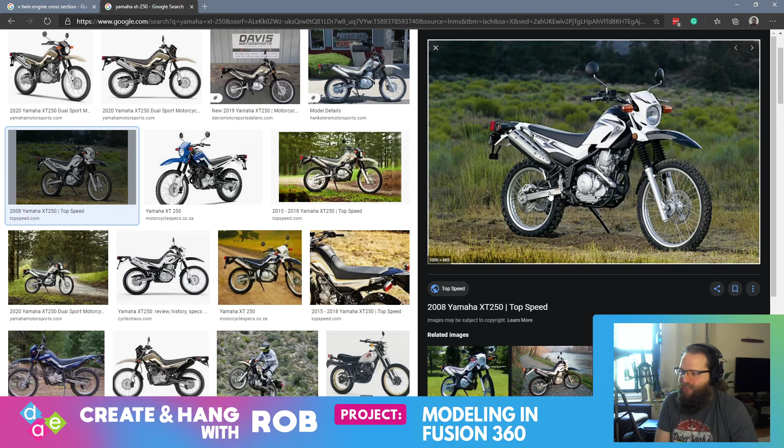It's an air-cooled, single-cylinder, carbureted thumper, 250 cc's, super light, super low seat height, super torquey engine. Awesome bike to learn on, an absolute blast. At that point, I didn't do any off-road riding - it was just the first bike I got because it was inexpensive, easy to learn on, and light. Plus, you have to love Japanese motors because they're absolutely bulletproof. You cannot kill the motor in an XT250, you'd really have to try. Never need valve adjustments or anything like that. They're amazing engines. Anyway, that was my first bike.

Throughout the last 12 years, I've owned a couple of different bikes. I had a Yamaha Cruiser, a Harley, a sport bike, and a couple of other dual sport bikes. Now currently I ride a KTM 1090 Adventure R and a KTM Duke 390. The Duke 390's got a little single cylinder 390cc thumper engine - probably the most fun bike I've ever ridden in my entire life. Absolutely awesome. And my KTM 1090 looks like this.

I had just gotten that bike not too long before then, and the bike's a lot bigger than an XT250 and any other bike I've ridden off-road, so it's a little intimidating, but since then I've gotten pretty good at riding a big bike off-road.

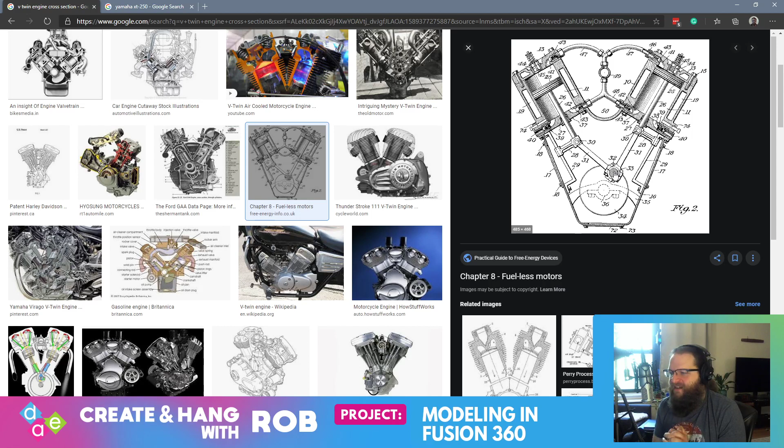And so what I've done thus far is not very much. I'll take you through. So I basically drew up a crank. Here's our crank. And of course, I've separated these out into all different components in case I want to try and simulate some motion later. But at any rate, I have a number of components here.

So first thing I have is I have piston 1 and piston 2 as two separate components. Let's shut everything else off except these. So in the piston, what I've done is I've made a little pocket joint there. Probably not the ideal setup for a real engine, but I don't care. I just want this to function.

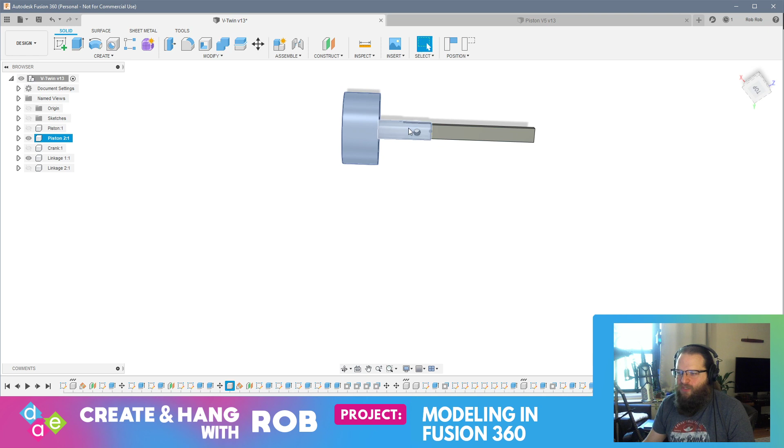And when we've got our linkage, the linkage slips into that little pocket, and basically we'll be able to put a pin in this to hold it in place. There's going to be a little head of the pin on both sides going through. The other thing that's going to be really interesting is the head of the pin is going to need to be curved. That's going to be interesting.

But because we've done this in separate components, I think it shouldn't be too hard. So I've done that - I've made the linkage arm slot into that. We can put our other piston and linkage on, and you can see I've done the same thing. These are 75 degrees apart.

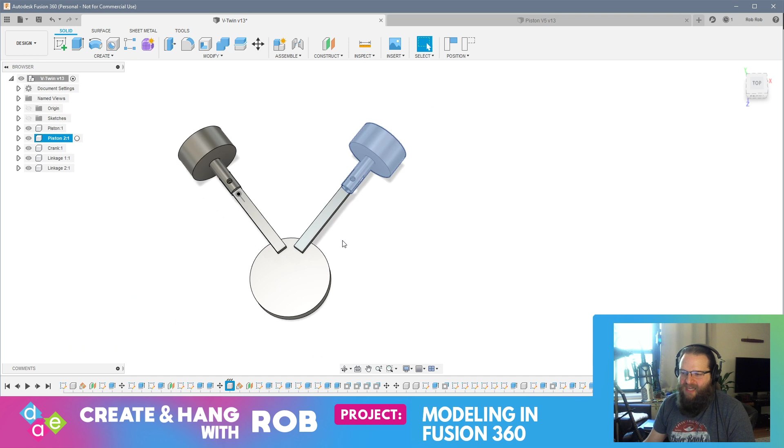And then I've got a crank down here, and basically I'm going to set up the linkage down on the bottom. And it looks like I may actually need to move the crank down a little bit so that those two linkage arms come together and meet at a nice central point.

There'll be a hinge here and a hinge here, and then we'll have a hinge on the bottom. And that way, when this turns, these two linkage arms can rotate around, and that will cause the pistons to move up and down. Eventually, what I'm planning on doing is designing some cylinder heads that have little cutouts so you can see the pistons moving up and down inside of them.

And then I'll probably have a base. So we'll have a base, we'll have the V-twin, and we'll have a hand crank that will power our V-twin motor. Now, normally, the V-twin motor runs, and that crank is then connected to a linkage to the transmission.

And then the transmission is connected to the final drive, which is either a chain or belt or shaft, and that's what turns the rear wheel. So the engine creates the power. The power is transferred through a series of different steps: transmission, the primary, the transmission, the final drive, so on and so forth.

We're going to run this in reverse. So we're going to be the power, and that's going to run power through the V-twin to get the pieces to move. So not that that makes any difference to this project. I just thought I'd share that.

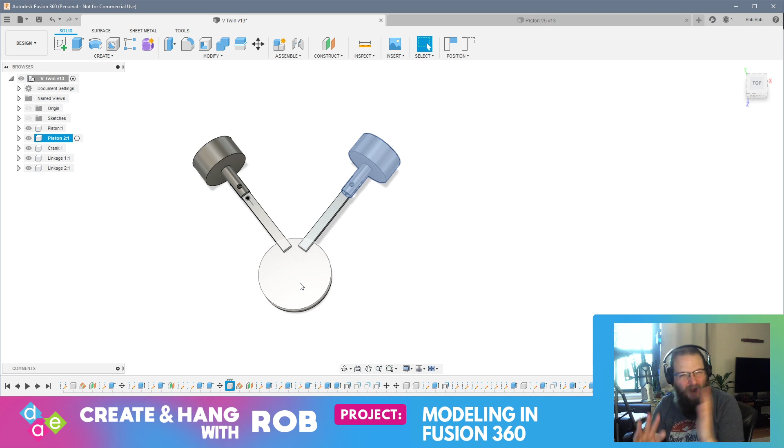So we'll basically have a hand crank connected directly to the crank to get this thing to move. Probably on the outside, there'll be a linkage of some kind. So at any rate, that's where we're at.

So I think the first step of what I'd like to do is move this crank down just a small amount and then pull these out. And then we'll design the hinge on this part. Then I think I might take a stab at the pins. And then I might take a stab at doing the cylinder heads.

But I have no idea - flying by the seat of my pants today. But I got all the preliminary stuff done, so I don't have to bumble around with measurements and angles and all that. Basically, what I had done originally is I had created some sketches.

Now, I moved things around, so these are going to look really weird. But I had created some sketches. Let's just turn them all on so you can see. I created some sketches to figure out where the crank was going, and I had pulled the 70-degree point down to the center of that.

That might have been wrong. I should have gotten the 70-degree point from the... Well, I'm going to move the whole crank down, so it doesn't make a difference. But at any rate, I used some guides - I drew some guides to help me figure out those angles. Probably would have been a better way to do that, but that's okay.

So, to start out with, I think let's take this crank and let's move it down slightly. That looks good. So, there's my crank.

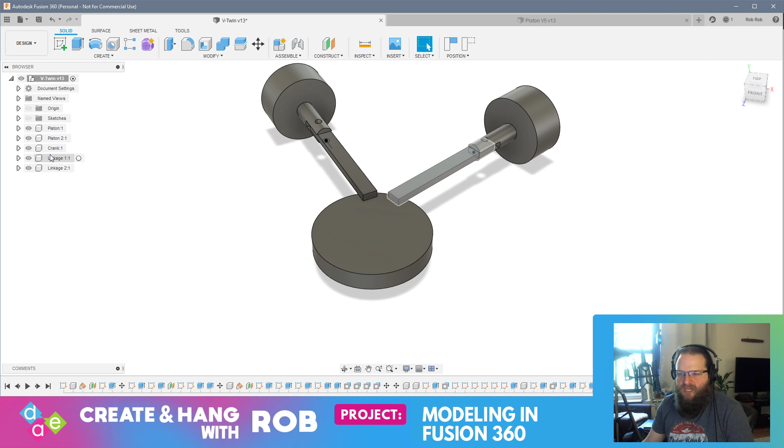Very good. Then what I'd like to do is let's get linkage 1, and we're going to basically... let's just activate that, and we'll push-pull this down 160. Actually, you know what? Whoa, that was 1,000. That's not going to work. Let's bring it down 155, and then we'll do the same here.

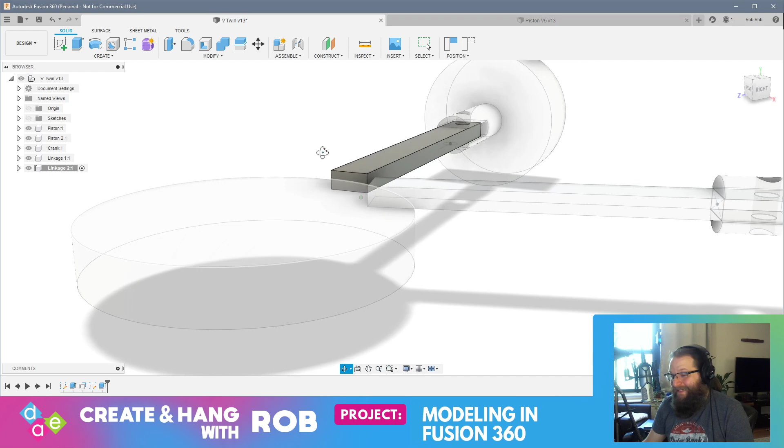All right, cool. So now I've got the linkages to a point where I now, on the crank, can draw a nice circle, and then I need to figure out how I'm going to connect these. How am I going to connect these? Well, at any rate, what I think we should do...

What I'm a little perplexed about is figuring out... Let's get this top view here. Something also looks off about this, but I'm not sure what's wrong with it. So be it—let's pull this down a little bit more. Let's make it 160, and we'll do the same with this. All right, beautiful, that's looking better.

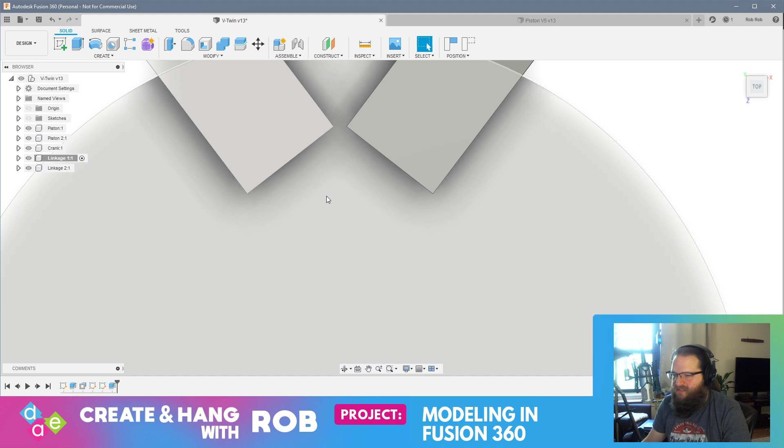Now what I think I'll do is draw a circle. I'm going to kind of eyeball it, which I probably shouldn't. I probably should pull these to where they intersect and find the center point, but forget it—let's just keep it simple so we can keep this project moving.

So we're going to sketch on this face. Capture position, that's fine, and I think we can probably eyeball this. If I go about here and draw—let's make it a 50. No, let's make it a 40. Let's make it a 30. I think we can work with this because now we can design some rings that fit around this.

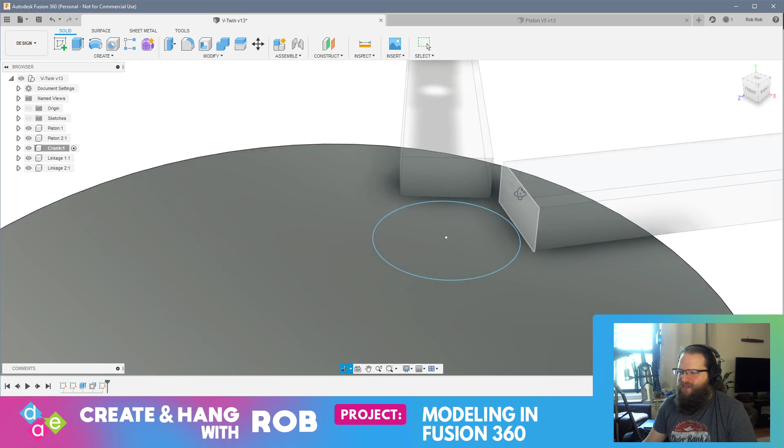Well, let's start with the sketch. I'm having some thoughts—these are separate components, so I don't know if I can join these two together. I probably should keep them separate because I have to think about how these are going to fit around this. Maybe I can make offset rings.

So the height of this is whatever the height is. Did I just draw that sketch on the wrong—no, I drew it on the crank. Okay, I just... back up. I think what I can do is draw some offset rings around these to get them to work properly.

So half the height of the bottom one will go on the bottom, and half the height of the top one will go on the top. They may be flimsy, but I don't know. At any rate, what I think I'm going to do is make a hole, because this needs to be assembled—this can't be all rigid.

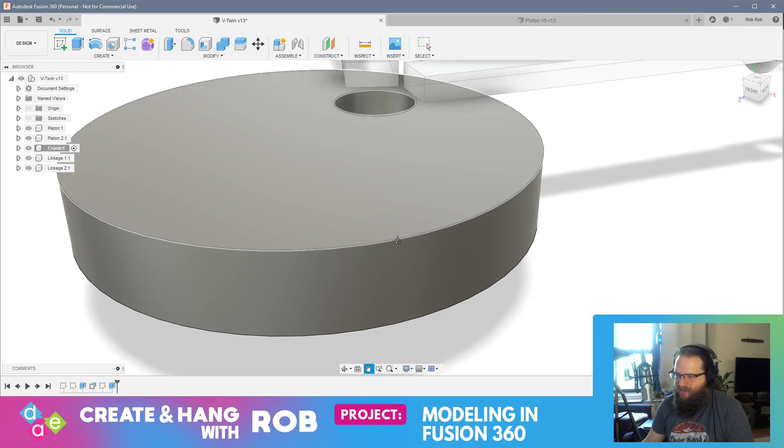So now I have this hole here, right? And I think maybe what we can do is design a pin as a separate component that pushes through. So basically there'll be a cap and a pin—a 30 millimeter pin, or it'll be 29.5 millimeters—that pushes through and comes up a little more than the height of these, and then we can put a cap on the other side. I think that's what we'll do.

So I should save this. Let's make a new component—new component. We're going to call this crank pin. The parent will be our assembly. Apparently you can nest components within components, so maybe there's a way to do this that way, but I don't really know how. I don't know the details. That might be a Lars Christensen question, but we're going to figure it out.

Okay, so I now have my crank pin, and I'm going to start a sketch on the face of this. Part of the beauty of working with components: first of all, components have their own timelines. You can see I have just one item in my crank pin timeline, which was me creating this sketch. They have their own sketches, bodies, and origins—all these little self-contained units with their own geometry.

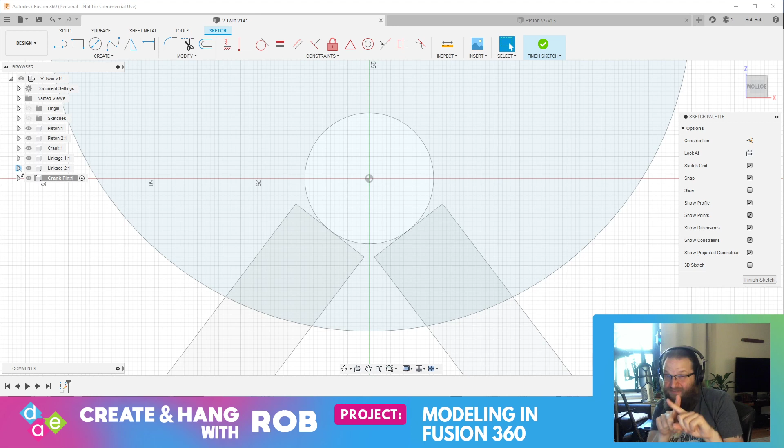The other thing I love about components is you can use other elements in your assembly as guides for sketches, but they don't join together. Whereas if I didn't use components, and the pieces were touching, they'd become new bodies and all get joined together—don't want that to happen. So I can use the geometry here.

So what we'll do is create a center point circle. We're going to make it 29.5 because I want to leave a little tolerance—I really should give a millimeter of tolerance, but whatever. So I've got this now, and let's grab our new sketch.

And we're going to press pull it and bring it up—whatever the height of this is, which I actually don't recall. I think I made it negative, should be negative 25. Is that right? No, see that's sticking through at negative 24. Oddly I made it 24. I'm going to bring it to 24 and a half, so I have just a little...

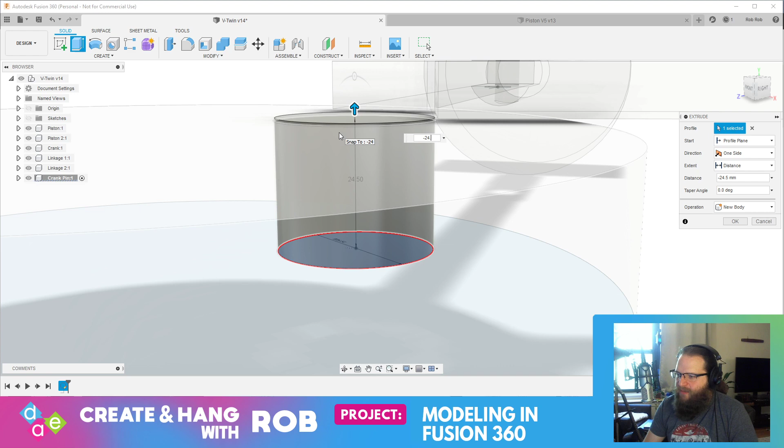Well, actually, that's not true—I need this to come out quite a bit more. Let's make it negative 30. Nope, negative 40. Negative 35—see, I didn't write down those dimensions. There we go, that should be...

That looks fine, negative 30. Okay, so I've got that, which is good. Now I think what I'd like to do is press pull this face down 0.5, just to give a little teeny bit of tolerance.

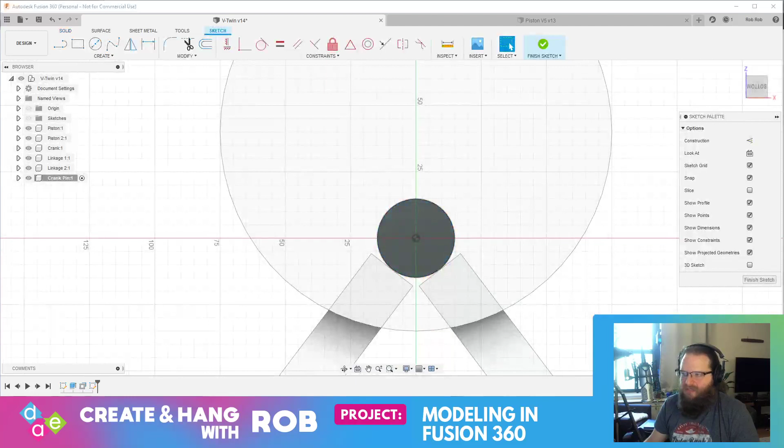And then I'll draw a pin end on that so it holds it in place. So we're going to sketch on this face and make a circle. I think I'd made that 30-something in diameter, so let's just make it 40. That should work. All right, then we will basically press pull these faces.

We'll bring that up 5. Way too much, let's bring it up 3. Very good. And of course I have to fillet this edge because, you know, why not? Because it looks nice. Totally unnecessary.

Okay, so now that I've got that done, what I need to do is make a cap on this to hold everything in place. So I think that I need these to be... yeah, let's make a sketch here, and we'll make a center point circle.

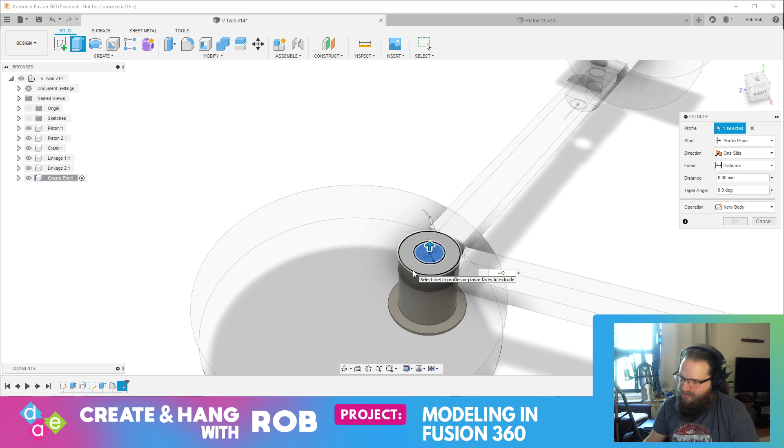And I'm going to make the hole in this. Let's just make it half the diameter. That's fine. And I think we can press this down about -10. Right? Now we have like a 10 millimeter hole going through this. I think that should be fine, because worst comes to worst, I'll just glue the cap in place.

And we can sketch on this face now, and I'll make a center point circle. Now I made that 15 in diameter, so let's make this 14.5. You know what, let's make it 14. Not 114. So that's great.

So now I can take this and pull it downward. If I bring it down -10, let's bring it to -9.5. Right, now it's a separate body. And actually, let's pull this up 0.5 so there's a little separation. Then I'll sketch on this.

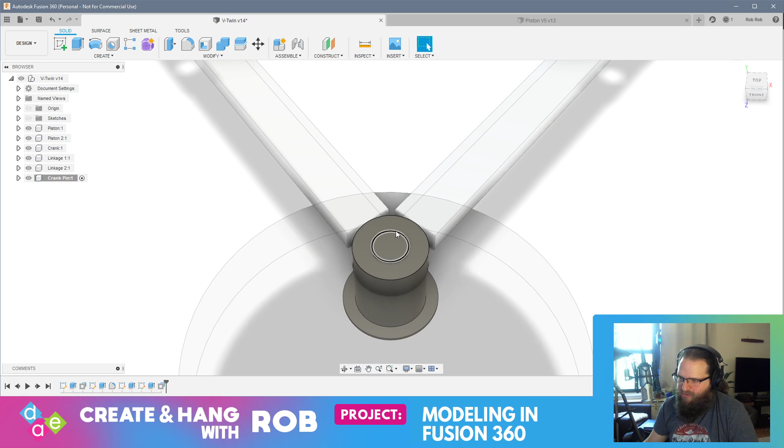I ran into an issue last time with my single cylinder mechanism, which basically, let's see, I made this, I think, 30... 35? No, I made it 40.

I ran into a situation last time where when I was drawing the pins to hold all the linkages and things in place, I have the outer part of the pin, then there's a hole, then there's the inner part of the pin, and I drew that and pushed it into that negative area. I pulled it too far down, and it connected it all as one body, and I wasn't able to 3D print it. Or at least when I went to export the STLs, they were all connected, so I would have to go back and fix that, but I'm not going to do that right now.

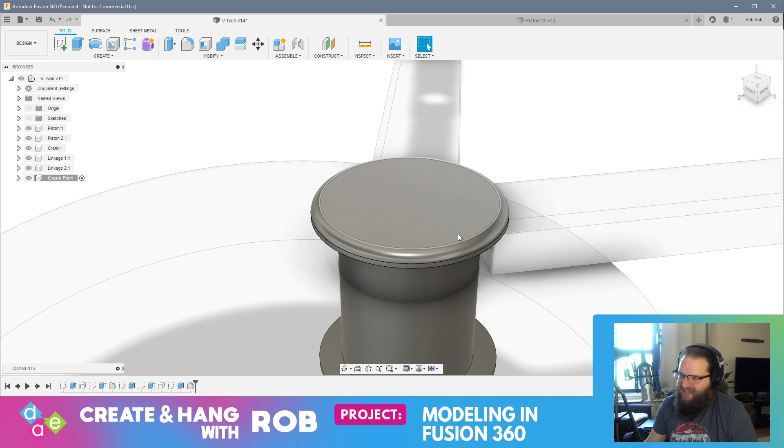Okay, there's my pin to hold the cranks in place. So let's save this, and let's view our entire assembly here. All right, great. So there's that part of this. Okay, great.

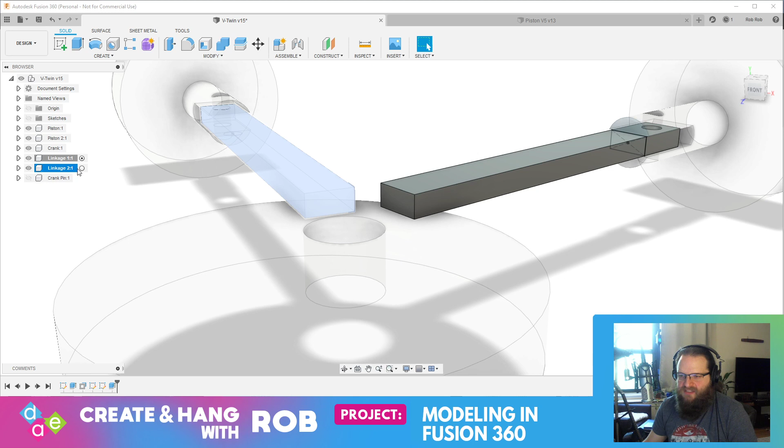Next challenge, let's get rid of the crank pin. And I need to back these linkages off a little bit. Let's back this linkage off. We'll do 155. No, let's make it 150. I'll do the same on this linkage. Select that component, we'll make it 150.

Great, okay, so now what I'm going to do, I'm going to start with linkage number 1. This is going to be tough, but we're going to make it work. We're drawing in that component, and I'm going to draw a sketch on this face. And I'm going to make a circle of a diameter of, let's make it 32, right?

We can make it 31. Okay, and then I'll make another circle, and we'll make that, what did I say, 32? Okay, let's do that. So I've got this now.

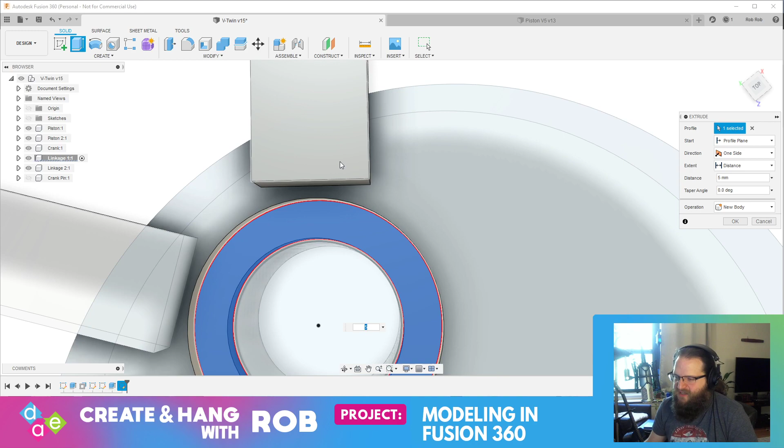And what I'm going to do is pull this up 5. Okay, cool. And now I need to make this connect to this. So I think what I'll do is I'll draw another sketch.

All right, I have an idea. So let's sketch on this face. And I'm going to basically... let's get the top here. And I think what I'll do... all right, let's try this.

I'm going to do a 3-point arc. I'm going to start at this corner, right there, and then I'm going to bring this down to, let's say, here. And okay, let's do the same thing on the other side.

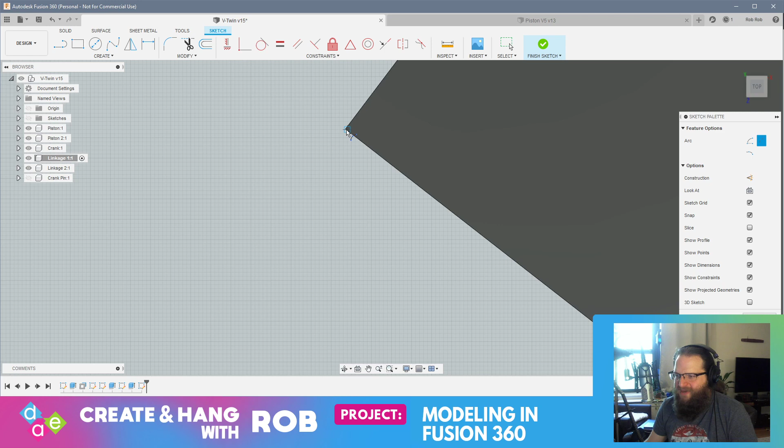You have to forgive me, I am extremely allergied out, because allergy season is coming around, so I can't breathe super well through my nose. So you may see me hanging out with my mouth open catching flies. That's solely because... oh, see, this is my perspective is weird on this. You know what, I'm going to undo this. I can't really breathe through my nose very well. That was the point of me telling that story. Odd story.

All right, you know what? I have another idea, let's sketch on this face. Once again, my angle is weird.

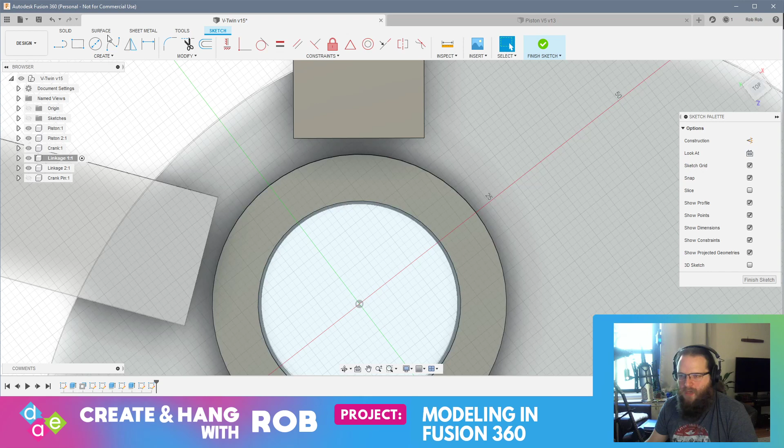All right, we'll do our best. All right, got our Wolf and Raven on today. Always, always Wolf and Raven. Always.

Just gonna... there we go, good. What we'll do is we'll come to here.

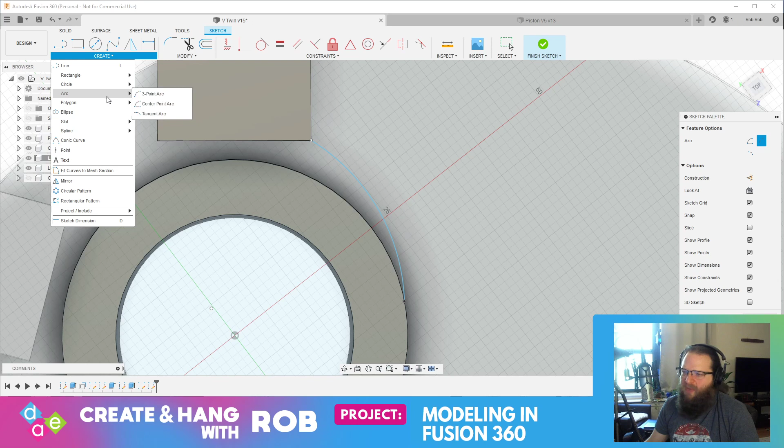I should have taken note of that. All right, I'm just going to do my best with this. I don't want to go crazy. It might not be totally exact, but it's gonna be good enough.

That looks pretty good. All right, and I need to connect these lines now. Hold on a second, let's edit this sketch.

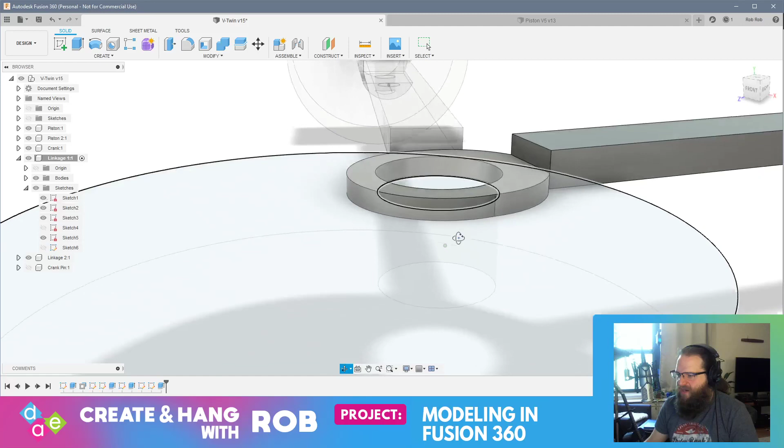So now I've got this little ring, right? Perfecto. Okay, so now what I'm going to do - I could probably connect this or fill it back, but I'll leave it the way it is. Maybe what I'll end up doing is drawing an arc or something to fill that down.

I think I have a problem here. Well, that's all right, no problem. Let's get rid of the crank for a sec.

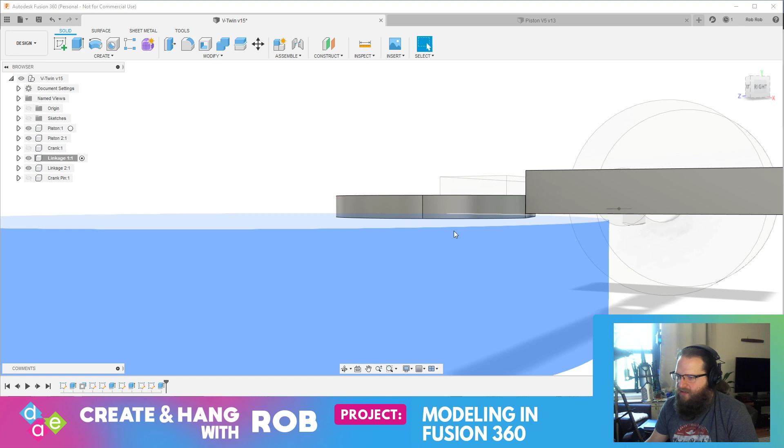Let's press pull this up, 0.5. There we are. And let's press pull this - so we brought that up. So that's 4.

So this is -4, and that goes to 5.5. Let's bring it up 0.5, that should be about halfway. Okay, fine, all right, cool.

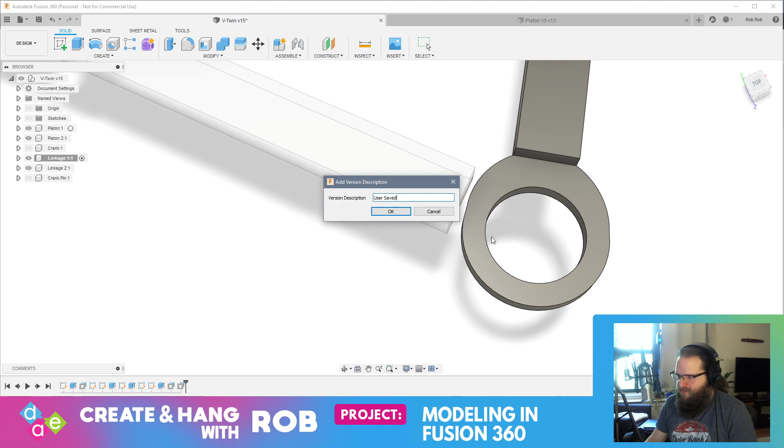Now what we'll do now - let me just save this really quick. You can see it's a little lopsided, but I really don't care. It's good enough, honestly fine. I probably could have done that another way, but whatever.

Okay, so now we're going to switch to this linkage, and I'm basically going to trace this but on this side. So I'm going to make a sketch here. I'll start with this and make my 31 millimeter circle, and then I'm going to make another 30, whatever it was, 30, 40, 45. Okay, there we go, and we'll finish that sketch.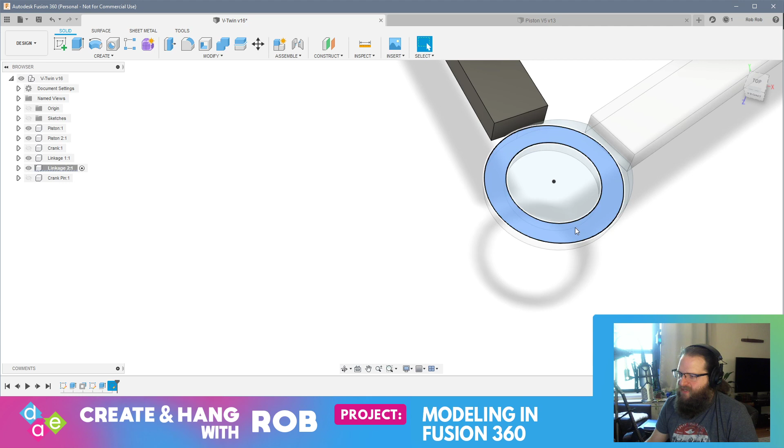And now I'll basically press pull this up - I'm just going to bring it up 4.5 for now. And then I actually need to press the bottom up a little bit. I'll bring that up negative 0.5. I think I can bring this up a bit more. There we go, that's it.

Okay great, all right so now I've got the ring. And so now, once again, I'll sketch on top of this, and we will make our little, I don't know, we'll make that 3-point arc thing again and push it down the 5, and then we should be good to go. All right, very good, sorry, I got lost in my thoughts there for a minute.

Let's do this. Let's get on the corner here, and I think we'll bring it to about here. Good, and then we'll do the same thing here.

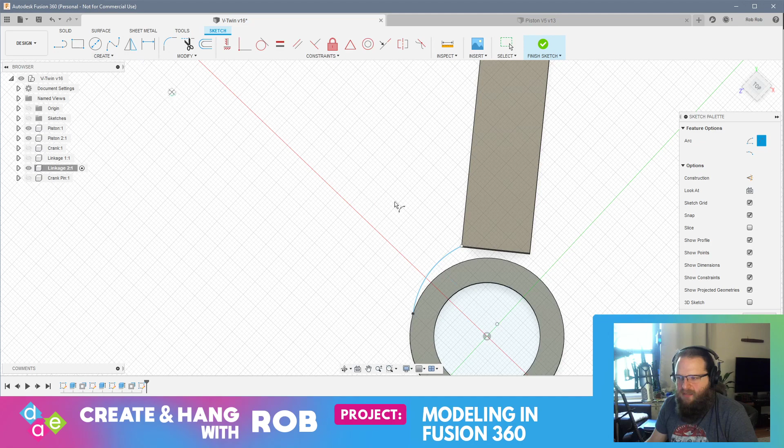And again, I don't care how perfect this is, I'm just trying to... so somewhere around here. That's pretty off, I don't care, I'm going to go with it.

Great, finish sketch. And now basically - yeah, it's not perfect, but I really don't care. Yeah, right? You can see that's pretty janky.

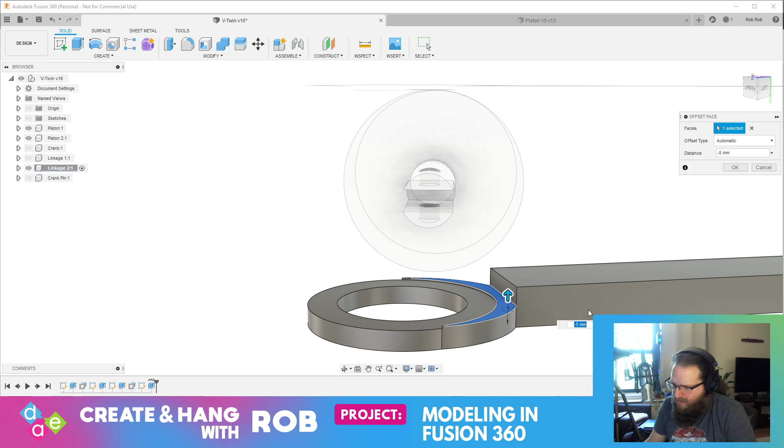Beautiful, okay, so now, there we go. Look at that, see how they sit together on that? Oh man, that's beautiful. And then, of course, I'll probably clean those edges up.

In fact, we might as well just do that now. Let me save - how are we doing on time? Halfway through, all right, very good.

Oh boy. Let's, what am I on? I'm editing this one, so let's put a sketch on this face. And I think what we should do is I'll just make an arc. That's fine, I'll make a 3-point arc.

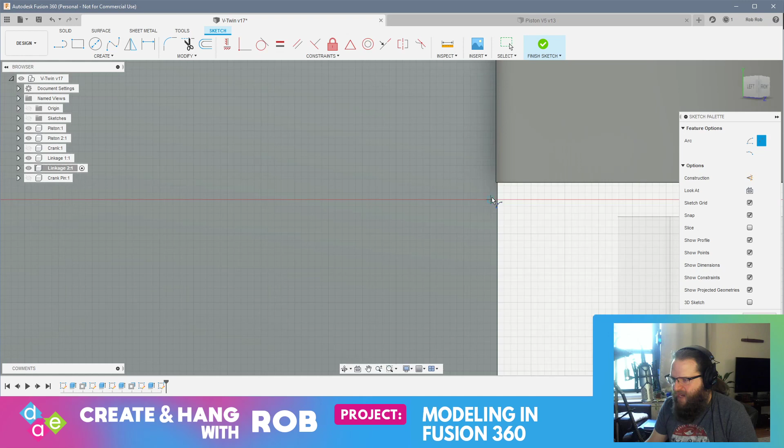And we'll basically grab from here to, so that would be, let's come out 15. Right, and then come to the joint, and we'll basically do that.

And now this, I can press pull and get rid of, and I got a little arc there. That's fine, right, cool, I got a little arc there. That looks nice. So we'll do the same thing here.

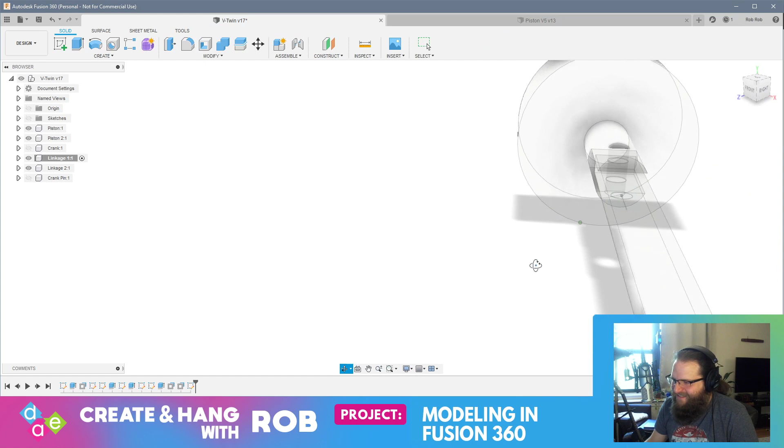So let's switch over to linkage number 1, make a sketch on this face, and I'll do the same thing again. I'll come in - oh my God, that's not connected. Oh no, oh that's awful. All right, hold on a second. I hope this one's connected. It looked like it was.

All right, what I'll do is I'll press pull this. That's fine, all right, these got connected. I sketched this one incorrectly. Whatever, it's fine, because I'm going to make the little arc thing anyway.

Wow, that was dopey, okay no worries. So, 3-point arc, here, and we will come in.

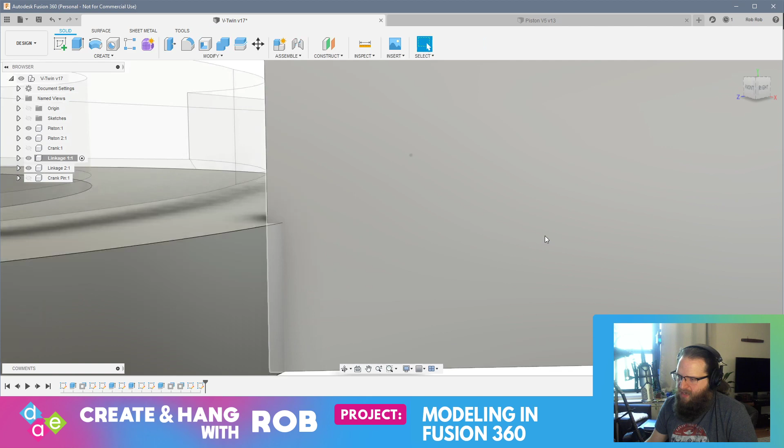What did I do here? See that? That's the one. Let's just go with that. That works for me. Oh, wait a minute. Oh, stupid. All right. Stupid, stupid, stupid. All right. Okay.

I'll tell you what, that KTM is really an incredible machine. I really love it. Like I said, I've owned a lot of bikes, and I really find that bike to be such an enjoyable experience to ride. You know, every bike has a positive and a negative, things that work well and things that don't work well.

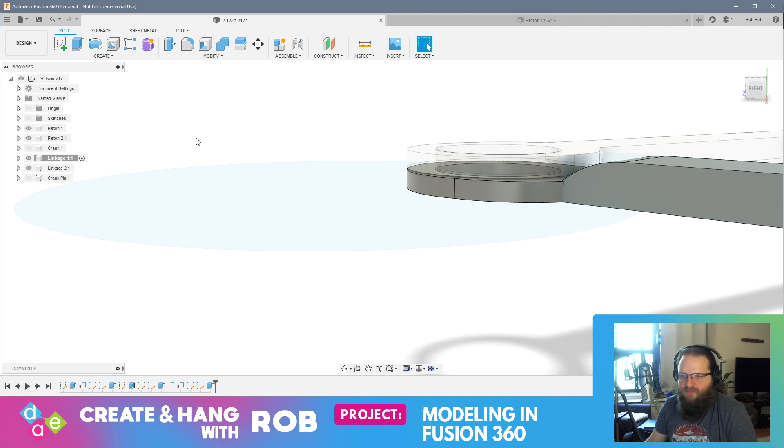All right, good. Perfect. Okay. And, you know, at first you buy a bike because you like its style, right? Oh, is that beautiful? Is that beautiful or what? Oh, wait, hold on. Let's put the... Oh, my goodness. Oh, my goodness. We'll see if any of these constrict with each other. They shouldn't. It should say separate.

Anyway, you buy a bike at first because you like its style. You like the way it looks, those kinds of things. You like its color, you like its design, you like the engine. But when you don't have a lot of riding experience, you don't know what fits you and what doesn't. So you buy it based on looks, and it might be a bike that doesn't fit you.

Unfortunately, sitting on it doesn't really give you a good indication. You could sit on a bike and it feels good, and then after 20 minutes of riding you start feeling pressure points and things like that. I've had a couple bikes that were perfectly fine, they just didn't fit me very well. And it took a little bit of riding experience.

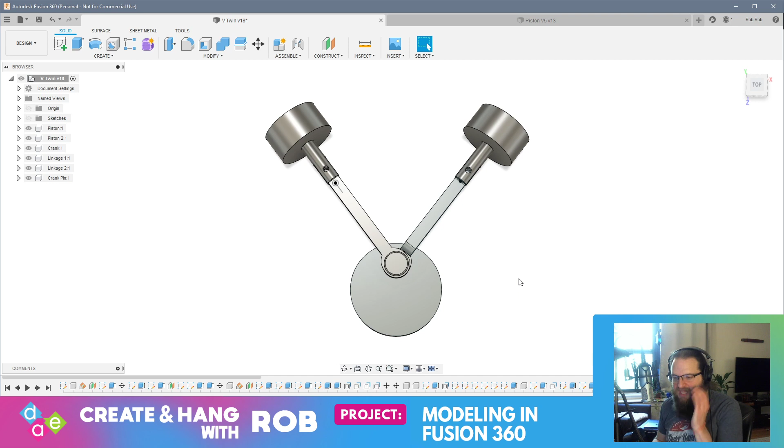I've ridden well over 100,000 miles in total over the last 12 years, and I know what works for me and what doesn't. I have some issues with my shoulders and neck, so bikes that are really leaned over... Like I had a super sport bike, a Yamaha R1. What an incredible machine.

But you're riding like in the fetal position, practically laying on your belly, craning your neck while you're riding. It was such a great bike, but it was not enjoyable to ride for a long time. You ride for an hour and then you need to get off and stretch. I've ridden for like 14 hours on my KTM 1090 with minimal discomfort.

That bike fits me well. It caters to all of my needs. The wind protection isn't the best in the world, but it's super smooth on the highway—I could sit on the highway all day. Super fun on twisty roads. If I see a cool dirt road, I can just ride on it. It just checks all the boxes for me. I absolutely love that bike. Riding with a passenger is great too.

Anyway, I absolutely love motorcycles. I like things with two wheels. I've been getting into mountain biking a lot lately. Maybe we'll design some mountain bike components—that would be cool. Anywho, I think what I'd like to do next—I'm really pleased with that.

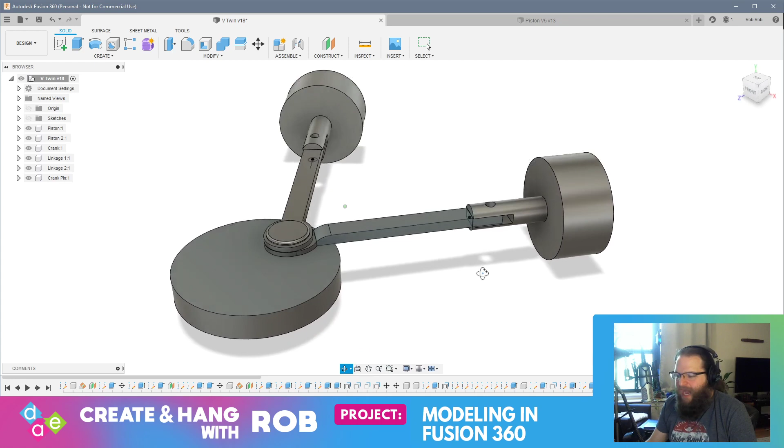See those offsets where it all links together? I am really pleased with that. I bet there's going to be some issues where I may need to cut a little bit more out when I actually print this. But, I mean, we got ourselves the beginning of a V-twin here. I am pretty psyched.

So what I think we'll do now is design the pins to hold this little joint in place, which is going to be interesting. I know what to do though, it's not going to be hard at all. I know what to do.

Okay, so let's start with linkage 1, this one. So let's create a new component, and we'll call it piston pin 1, and then we'll make piston pin 2. I could copy and paste it, but if you copy and paste a component, changes to one component apply to the second one—if I move one, the other moves. So I think I'm better off just doing them separately. I don't think it will be challenging.

So we'll make a new component. This will be called Piston Pin 1. Okay? We're on Piston Pin 1. We're all set up there.

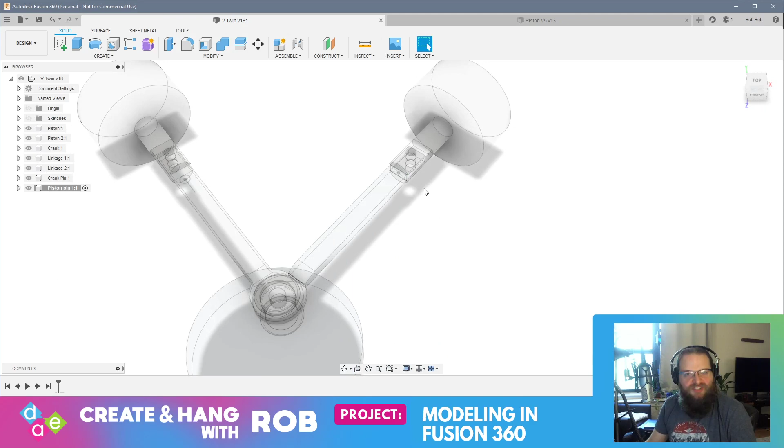Essentially what we'll do is make our simple, normal pin mechanism. Piece of cake, no challenge. The only difference is it needs to be curved. I mean, I could make it flat and just sitting on top, but where's the fun in that? Let's make it curved, it'll be awesome. And I know how to do it, I think.

Great, so let's start with the inner parts, and then we'll do the outer parts. What's going to be interesting? Why don't we just sketch on this face? That's what we'll do, we'll sketch on this face. Very good, here's a circle. We can make a circle. The question is, can we get the center point of it? I could do a 2-point circle.

Oh, that's annoying. No, see, that's off-centered. All right, let's try a... all right, let's do a 2-point circle.

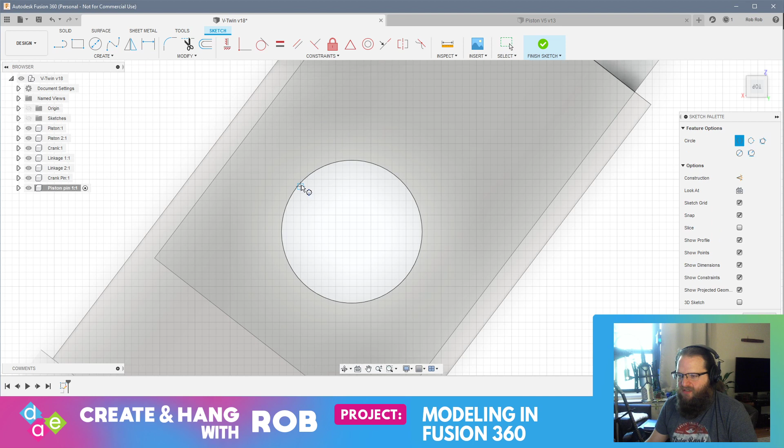Oh, you know what I'm going to do? Here, hold on, I'm having an issue lining the circle up, so I have a better idea. Ready for this? Let's get rid of linkage 1, and I can sketch on this face, and then I can just push-pull either direction. That's the way. See, now I can get the center point of the circle. Lovely, lovely. I think it's 10, so why don't we make it 9.5, because we need to put some tolerances on. Finish sketch. Lovely, lovely, lovely.

So now we're going to take this. Hold on, let's get this selected properly. It's going to come up, and I'm just going to push it up to here.

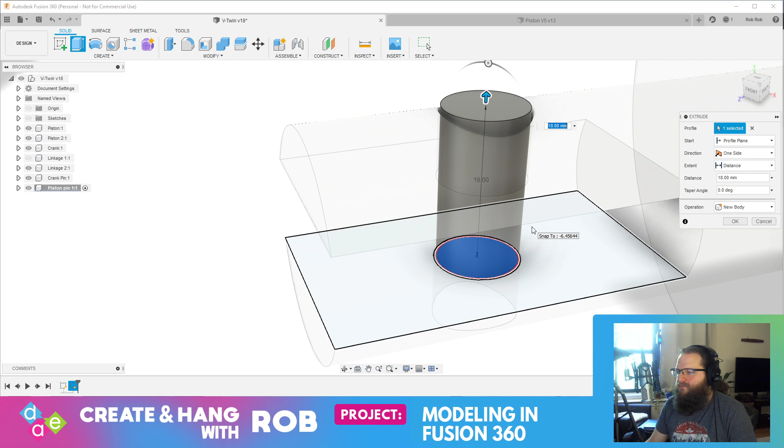I'm just having a thought. Don't worry about me. All right.

Let's just get the bottom part now, and let's bring this down.

So yeah, I recently discovered that I have, I knew about these, but I never actually did anything with it. There's an unbelievably nice mountain bike park right near my apartment, it's like 10 minutes away. And there's maybe like 8 miles of trails. I mean, it's nothing insane, but the trails are great. And what's awesome is they're really technical. And...

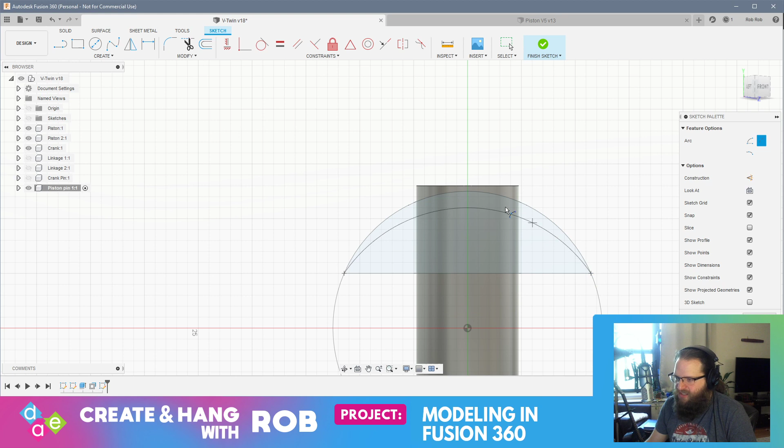Bear with me here, I have an idea. Ready for this? They're very, very technical and have a good mix of...

Hey! That looks like a curved top to me. So sweet, okay.

They have a very good mix of, like, downhill, uphill, technical rocks, drops, great trails. So, 10 minutes away, throw my bike on the bike rack and go there. Awesome. The closest place to ride my motorcycle off-road is not that close. So, it's... sorry...

I'm having a thought. All right, we'll do the other side first.

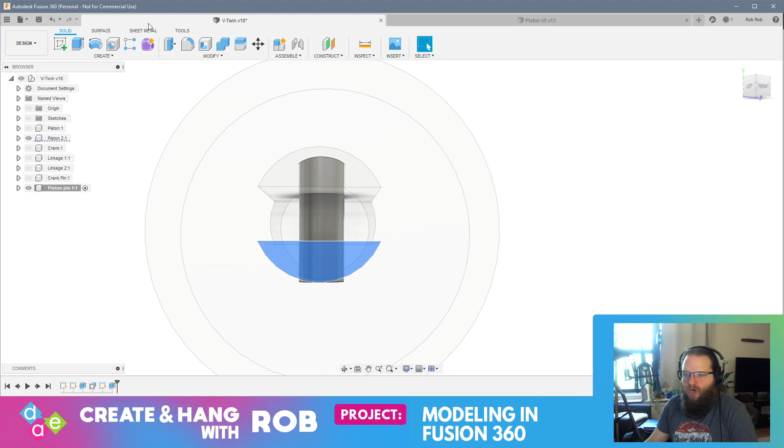Okay, so it's nice to be able to practice my off-roading skills so close to home. And quite honestly, the skills are very much the same. I mean, the body position is the same. Obviously, I'm not using a motor, I'm using my legs, but the body position is all the same. And it's all similar in terms of skills. So, it's quite fun.

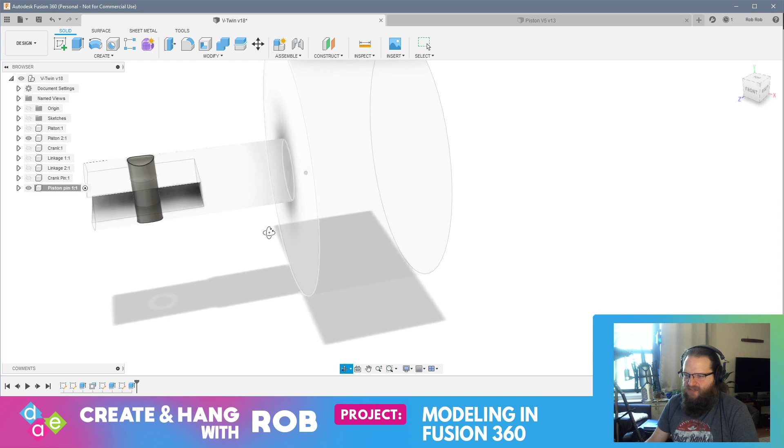All right, there's our curved pin. Lovely, lovely, it worked out great. Piston 1, all right, great. So there's the center part. Okay, just put the crank on for a sec. Cool, all right. No, I need the piston pin.

Okay, let's get rid of everything. Oh, I started on piston 2.

Oh, well. Yeah, it's really, really fun. A lot of uphill sections, a lot of downhill sections. Really good for working on fitness. It's great, it's just such an enjoyable experience.

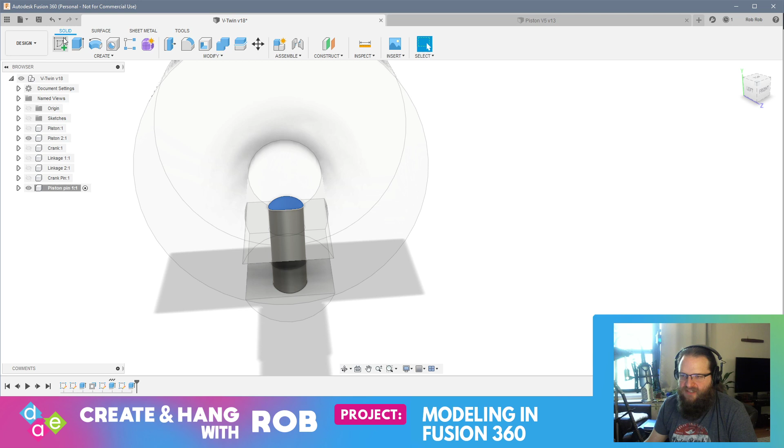Can I sketch on the top of this? All right, so here's what I'm going to have to do. Let's bring an offset plane up so it's...

Here's what I'm going to do. I'm just going to put this wherever for now, okay? And... sketch.

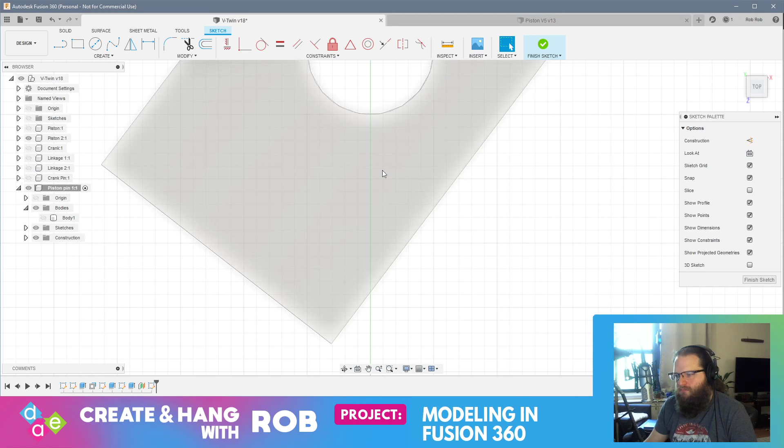Okay, yeah, great time. So let's make this 15...

Why is my zooming so slow? That's annoying. Oh. All right, there we go. All right, what's messing me up here? Why am I? It's because I'm... all right.

All right, I actually need this to come up quite a ways, so let's make this 5. No, let's make it... yeah, I'm going to make this 5. Okay, and then what I'm going to do...

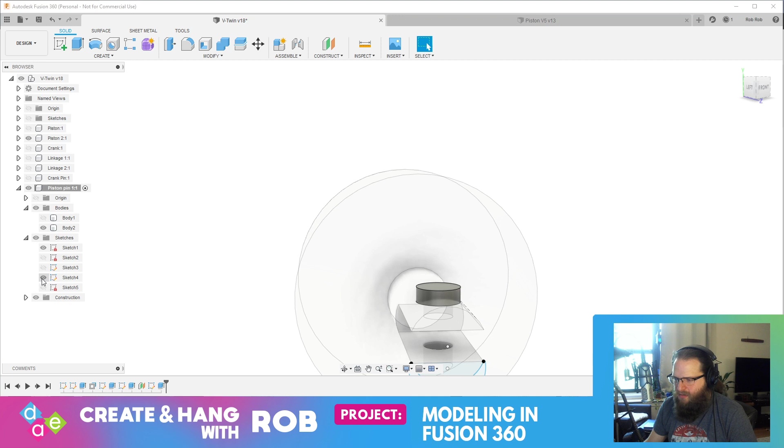Check this out, so we're going to hide this. Ooh, that's not going to work, we got to make this taller.

What was that? Oh. All right, I have 15 minutes left. Sounds like somebody just tried to get into my apartment. That's weird, got the door locked.

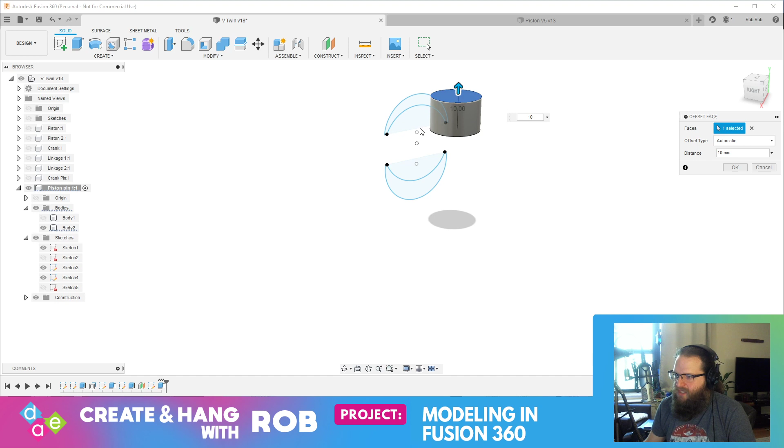I'm just going to make this really big for now. All right, and now what we'll do is I'm going to actually push-pull this up a little bit. That's too much.

Hearing all kinds of weird noises. Totally okay.

All right, let's see if this cuts this into two separate bodies. There's the head of the pin. Beautiful, all right, so now I should have this, and that is going to get removed.

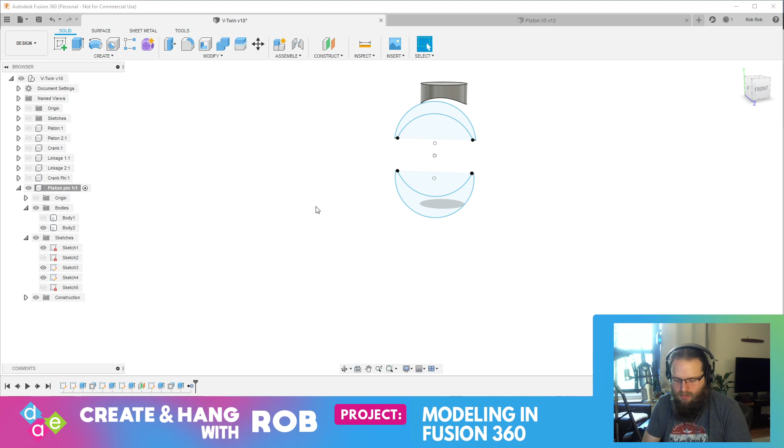Okay, good, good, good. Let me just make sure somebody's not trying to get into my apartment right now. Nope. Okay.

So now, can I offset this? Nope.

Cancel. What I think I can do... Oh, you know what I needed to do? Let me undo that, undo all that. And let's get these sketches turned off.

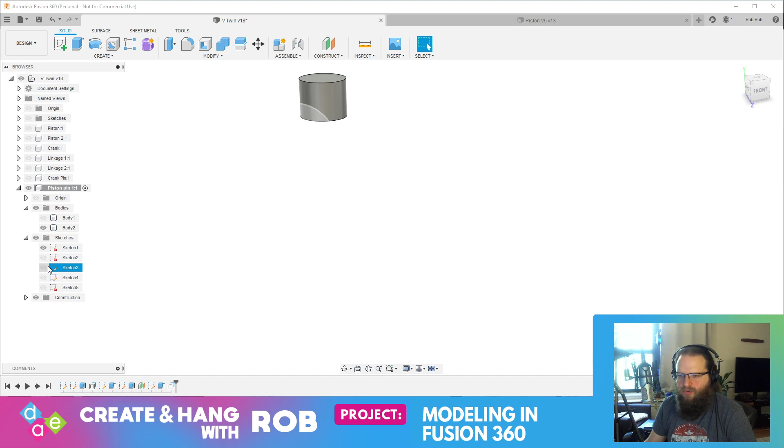What I'm going to need to do is turn on the piston. What I need to do in this case is actually trace this exact thing and cut that off. Okay, easy.

All right, so we'll do the same thing again. I actually want to cut the exact shape of this. Finish, right? And then I'll hide the piston. So then I've got the body here. This is going to work out great. So now I can take this and basically do that. Done. Okay, so now if I put this back on, it's nice and flush.

And then what we can do... this is obviously too tall, so... 8, 5. That looks pretty good. And once again, we can do a nice filleting of the edge. Too much. There it is.

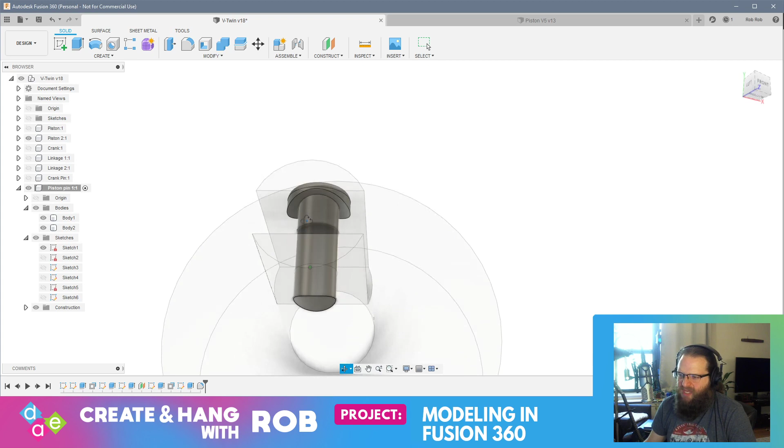Okay, so now there's part of a pin. Ho ho! What do you think about that? Woo! Okay, I think we'll have time to finish up the other pin, and that'll probably be it for today. So let me get rolling here.

Okay, so the first thing I'm going to need to do is make a hole in this. So, all right, I'm on the right component. Let's make an offset plane, and I'm just going to bring it above - actually, why don't I try and get it? That should be good, that'll work.

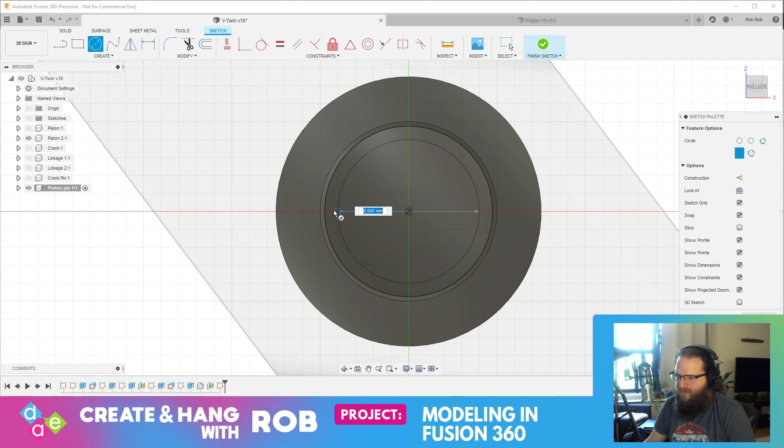Okay, so now I can sketch on this face, and I've got myself a nice circle. So we made this, I think it was 9.5. So why don't we make this 5? That should be quite fine. And let's press that in.

Minus 10. Looks good enough to me. Right on. Okay, so now we'll do another sketch. And this can be... actually, you know what?

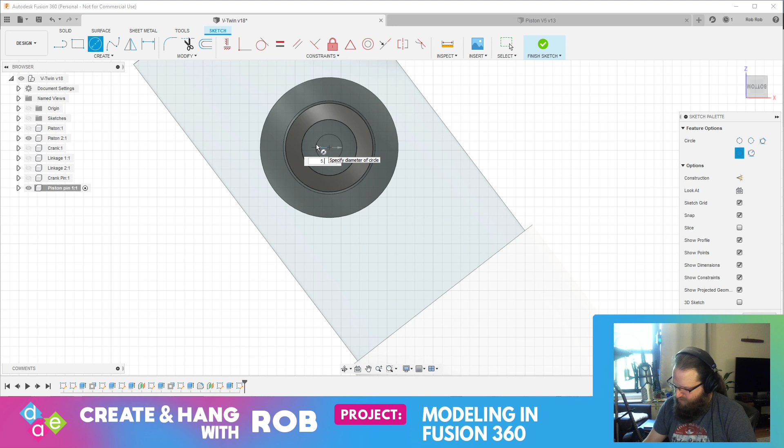Let's undo that. Let's make this 6. And then we can press pull this in, minus 10. And then we can make a nice sketch here. Do this, do this, we'll make this 5.5. And then that can get press pulled in, minus 9.5, because that was the wrong thing.

Oh, wait a minute, is that sketch at the bottom? Oh. Oh boy, what's going on here? I'm all out of whack. Okay, great, there we are. Oh, Wolf and Raven, you are very good.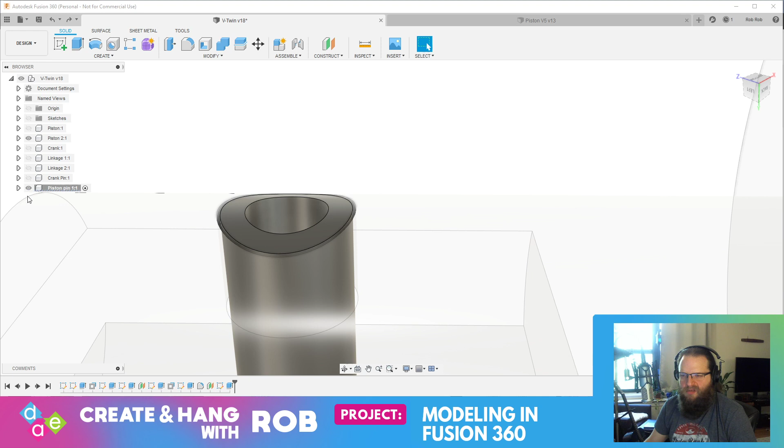Where was that construct I made? Huh? Alright, whatever. I made a hole in it, right? Hold on a minute, maybe I need to turn the sketch on.

Alright, so we'll make a sketch on here. There we go, that's what I wanted. Okay. Excellent. Finish sketch. So now I have another sketch that I can press pull down at minus 9.5. Great. Okay, so that now means that I need to

use this again. So body number 1 goes, and that stays. Because I want to... yes, okay, very good, body 1 goes. All right, so now we take this, we press pull, we get rid of this.

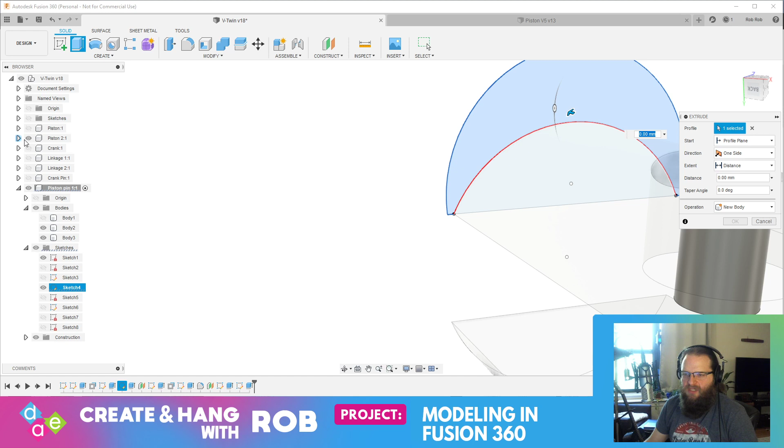So I learned this from my friend Lars, that Fusion 360 only cuts things that are visible. So you can use other components to draw out the geometry, and then - oh man, awesome - hide them, and it won't cut them. Absolutely awesome. All right, this...

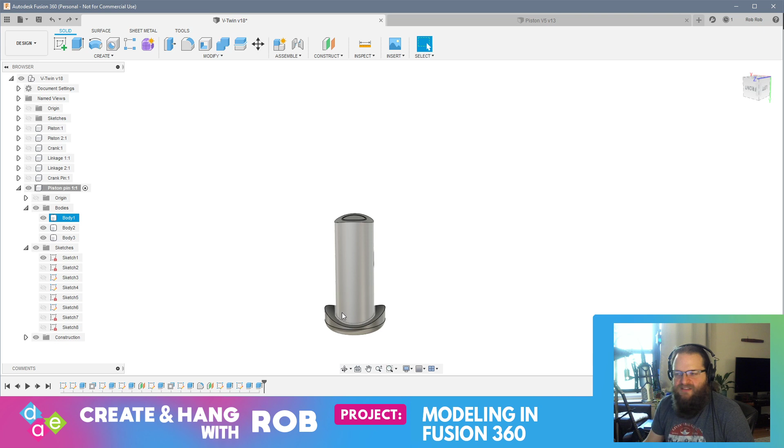Oh shoot, hold on. No, you know what, that's okay. Redo. Okay, great. So now comes the next tricky thing, which is I need to do the head once again, and I'm going to do it the same exact way. I'm really tickled with how nice this came out. I'm really so pleased. So here's what we're going to do.

We're going to bring our piston back, and I'm going to create an offset plane, and I'm just going to draw this wherever, like I did before. I'm going to do that, and then I'm going to hide this and this and this, and we'll make a nice sketch.

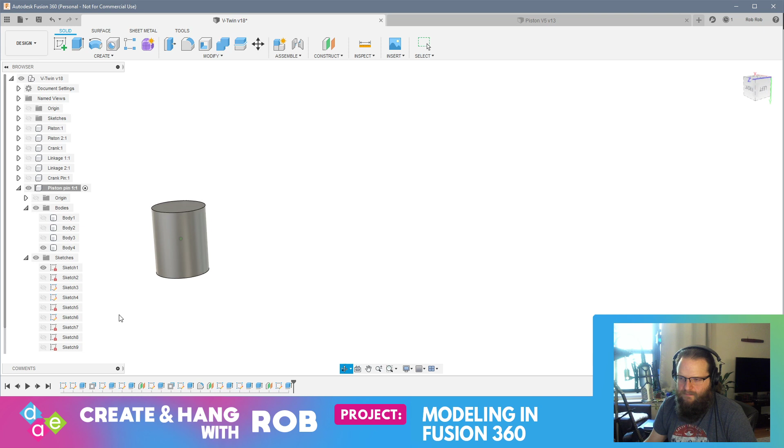And we are going to make this - I think I made it 15. Is that what I made it? I think I made it 15. Yep, there it is. Let's actually pull this down slightly. Okay.

Such a great album. Just love this album.

All right, we'll do our 3-point arc, match that, shave the bottom. How are we doing on time? All right, I think I'm only going to finish this one pin.

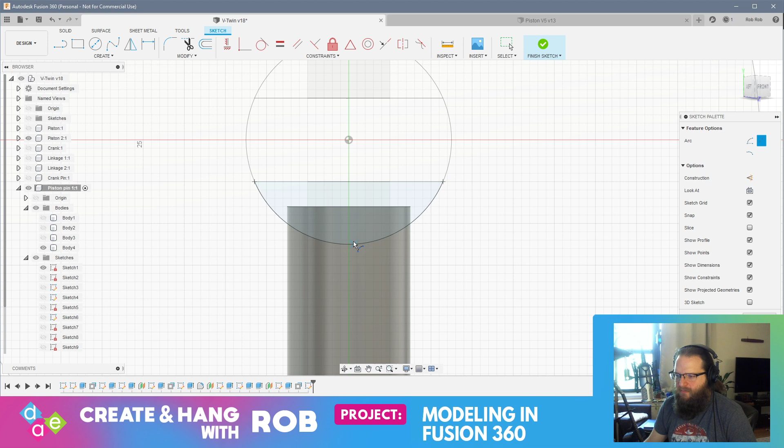It's okay, there it is. Finish sketch, I can hide this. I can take this and press pull. And this goes like that. Lovely. All right, so now if I put piston 2 on, oh, that looks pretty good.

That looks pretty good. Let's get these other bodies back on. Okay, that's the one I need. Okay, very good. Oh man, is that cool or what? And there's the pin, like so. These are all separate. Lovely.

Okay, so let's put piston 2 on. And first things first, let's bring this down. That looks about right. Now I gotta bring it up one more.

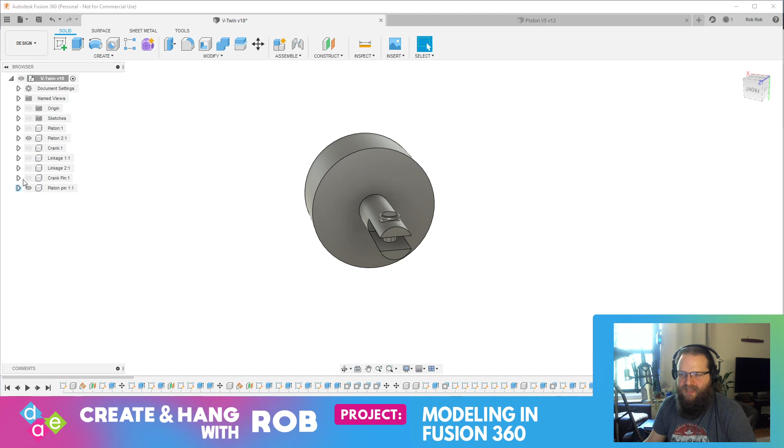That's it, that's our pin. Okay, so let's take a look at everything here. Everything's hidden, let's turn it all back on.

So I've got my lovely pin that holds my cranks together, and these lovely curved pins that hold my piston linkage in place. I'm so happy with that. And the way this is designed, these linkages can swing freely within this notch, which is great. Now I'm going to have to do that again.

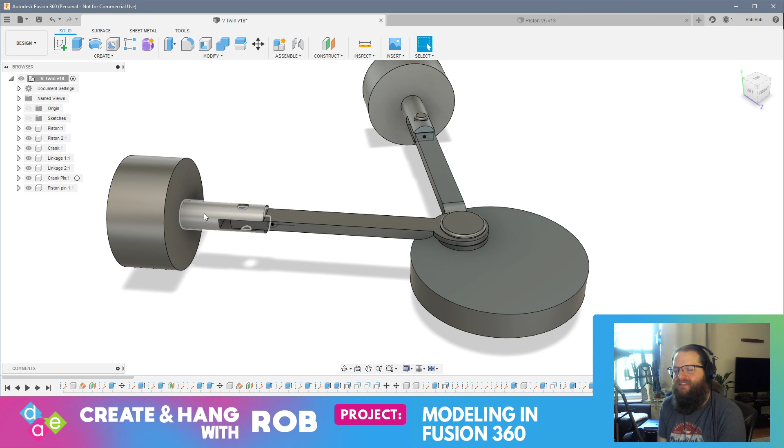I wonder if I can copy the bodies and then move them to another component. Let's quickly see if I can do that. So let's make a new component called Piston Pin 2. Okay, and what I'm going to do is let's go to this.

These need to be one body, I need to join these together. That's one. And then these need to be one body too. All right, that's better, now I have this and this.

All right, so if I take this, and I take this, and I select move, and I make a copy, and I pull it out... now I've got... what? Oh my goodness, these are contained in my new piston because I selected them. Whoa, that's so ridiculously cool.

Okay, so I need to rotate and place them. We should know the rotation, because if that's lined up there, that should be 75 degrees difference, right? So let's grab these, move them, and rotate them 75 degrees. That should be that there, right? That should work, and now I should be able to move these.

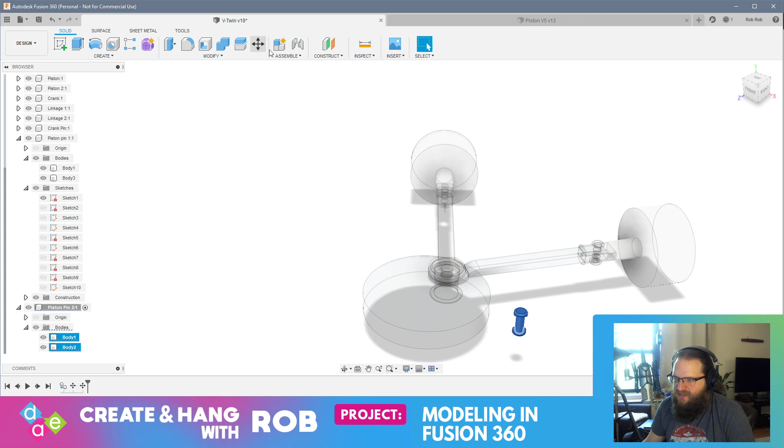I wonder if I can center it. So if I grab this, and I grab the align tool, and I align off of this, and that... wow, wow, wow, this is awesome. I can't believe that this worked. I can't believe that worked, that is so cool.

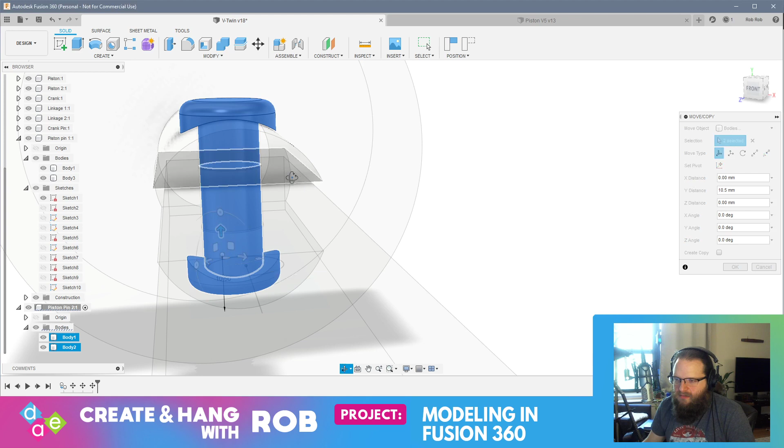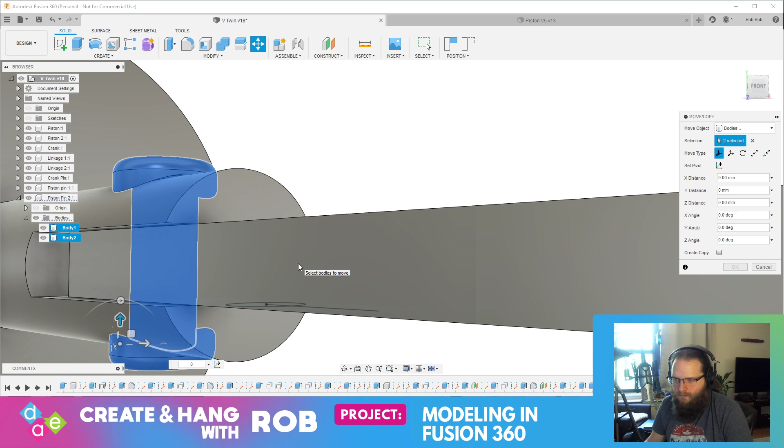Put the... let's just see for a second here if I go to... all right, it's got to go up 10.5. Huh. Why is that looking weird? Something's looking funny here. See what I'm saying? Something's looking funny here. Maybe the rotation was off.

I may end up just doing these again, I don't really like the way those look. I'm going to make a comment really quick: remake pins for Piston 1. All right, there's my comment.

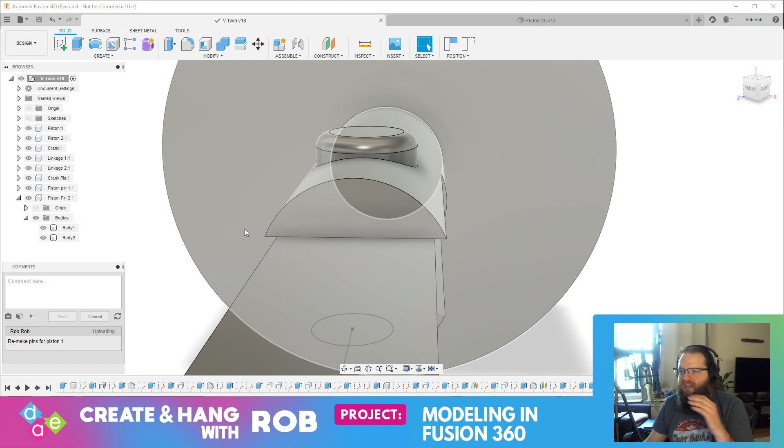Okay, so I think I'm going to call it here. Let me just save this. All right, it's uploading my comment, I don't know why it's taking so long for six words. At any rate, we're done here, so save. Oh, it's all saved. Okay, awesome, so I think we are in really good shape.

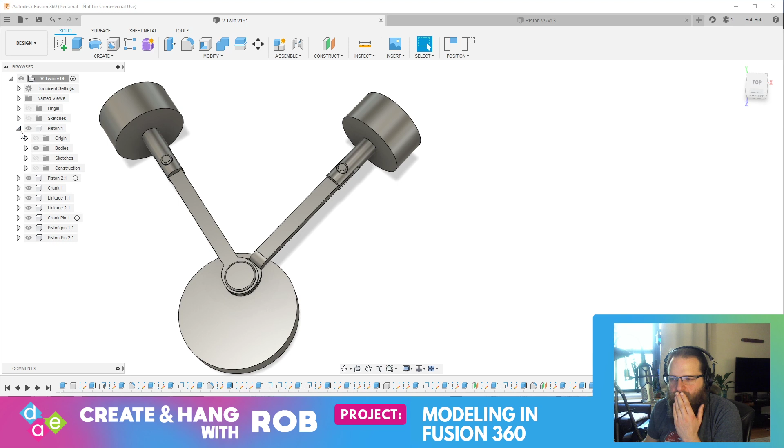We've got some linkages made. Let me just shut off some sketches. All right, there it is. So we're off to a good start, I've got pistons, I've got nice linkages all set up and ready to go.

I'm going to remake these pins in my own time, I'm not going to do that next week. So next week, I think what we'll do is we'll come up with the mechanism for how this crank actually works, and we will go from there.